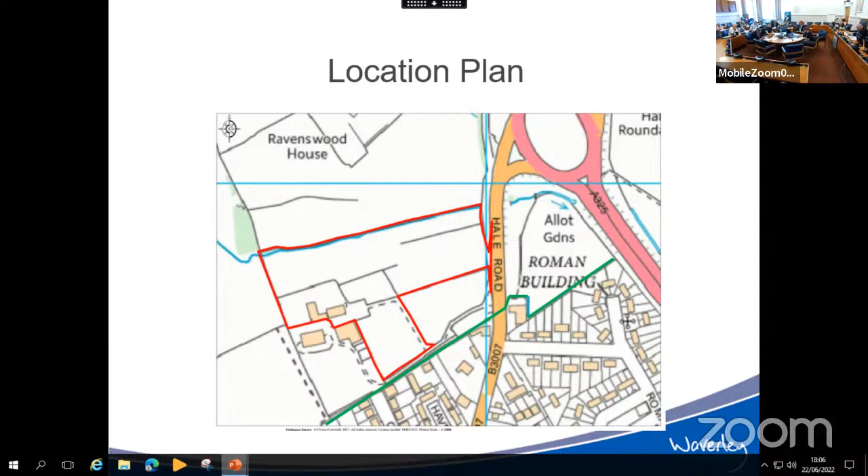So you can see it's a T-shaped site and it's on the edge of Farnham settlement. This green line here denotes the Farnham settlement boundary, so it is located in countryside. You've got the Six Bells roundabout here and the Six Bells public house here. It's an outline planning application with all matters reserved except for access, so the matters that aren't under consideration tonight are appearance, landscaping, layout and scale.

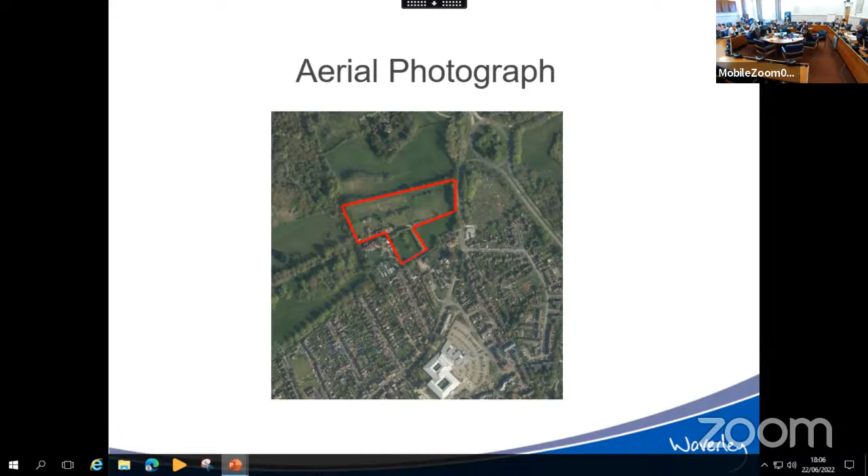This aerial photograph provides you with a bit more context, so you can see very clearly the line of the settlement here. There is also a footpath that runs along here, which is called the Scholars Greenway. You have Farnham Park located to the west of the site, which is an area of historic landscape and a historic park and garden. Should also point out this is the Leonard Cheshire Centre, a residential care home for children with learning disabilities. The site is located in an area of great landscape value and an area of high landscape value and sensitivity, as designated in the Farnham Neighbourhood Plan. So this aerial just helps you get your bearings of the site.

You can see the existing house to be demolished here. At the moment, access to the house is via a shared driveway, which continues up to the Leonard Cheshire Centre but also does a dogleg round to the dwelling.

The site is a combination of house, garden, paddocks and meadowland. You have the Nadder stream running along the northern boundary, and there's also a line of beech trees fronting along Hale Road.

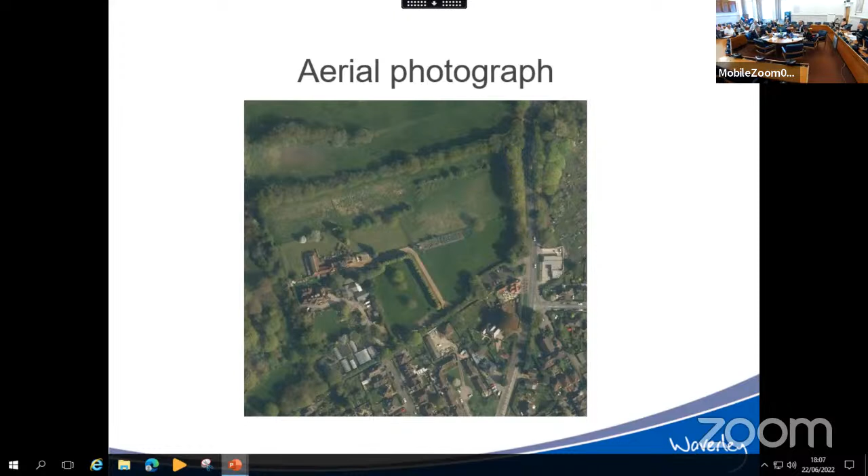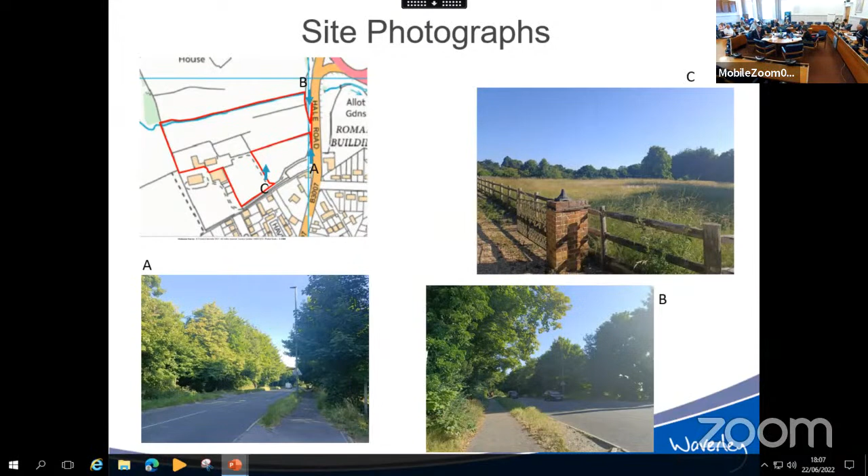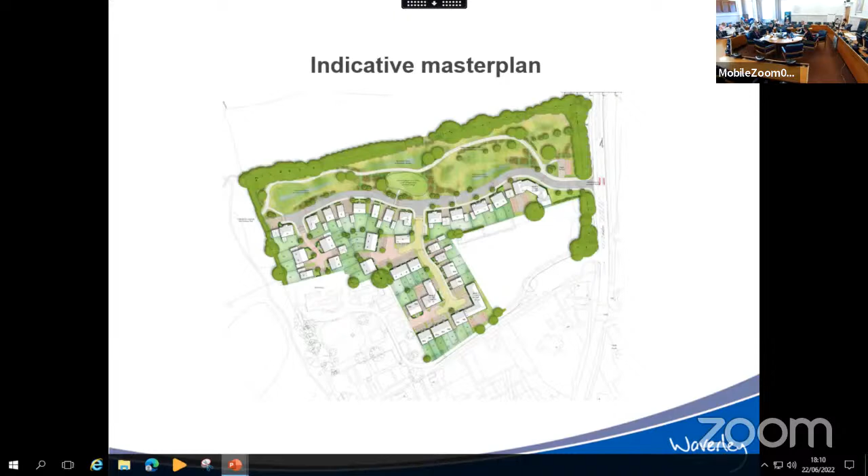So these are some indicative visuals. The first one gives you an idea of how a street scene could look. The second is a visual taken from the western side of the site, looking across the open space, giving an idea of the relationship between the houses and the proposed public open space.

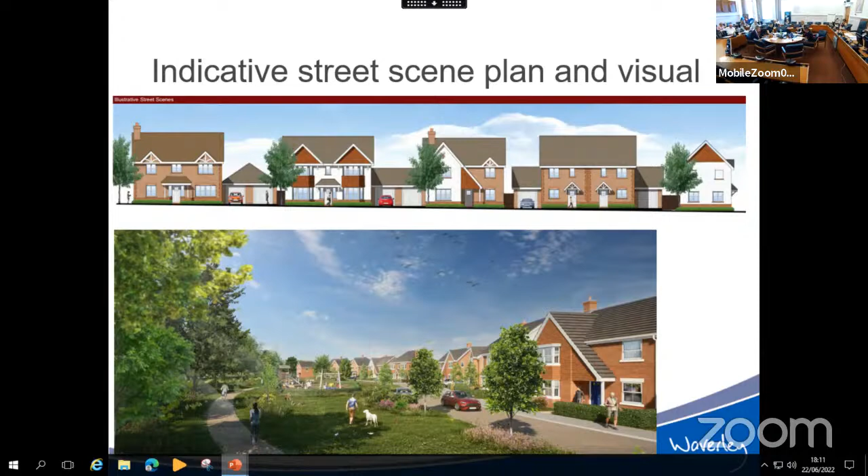We have given consideration of that aspect of the scheme to the trees. You've seen from the photos that there are some substantial trees fronting the site, and we've consulted the tree officer. Through special methods of construction, we feel that a lot of those trees would be retained, but we do acknowledge that some may be lost.

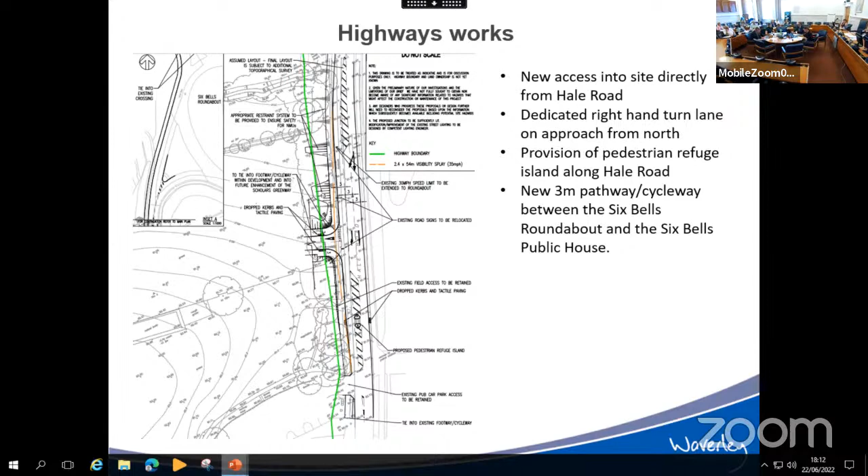So there is quite a lot of relevant planning history, and it is a significant material consideration when assessing this application. In 2017, an outline planning application was submitted for up to 65 dwellings, again with all matters reserved other than access.

This application also proposed open space at the northern end of the site, which was originally proposed as SANG land, but during appeal it was concluded that it could alternatively be public open space, with a contribution towards the SPA to mitigate potential impacts.

The application was refused on 8 grounds, and the decision was appealed. By the time the appeal came around, we were down to 2 reasons for refusal, because all other reasons had been addressed effectively and agreed between the applicant and the council.

The reasons for refusal related to the impact of the development on countryside beyond the green belt and an area of great landscape value, recognising conflict with the development plan, and that insufficient evidence had been provided to demonstrate that the number and density of units proposed was acceptable and wouldn't result in a cramped and crowded development out of character with the area.

The inspector's appeal conclusions are highly material to the consideration of this application. In considering the 2 reasons for refusal, on the second one relating to the quantum of development, the inspector felt the quantum was acceptable and didn't uphold the appeal on this basis.

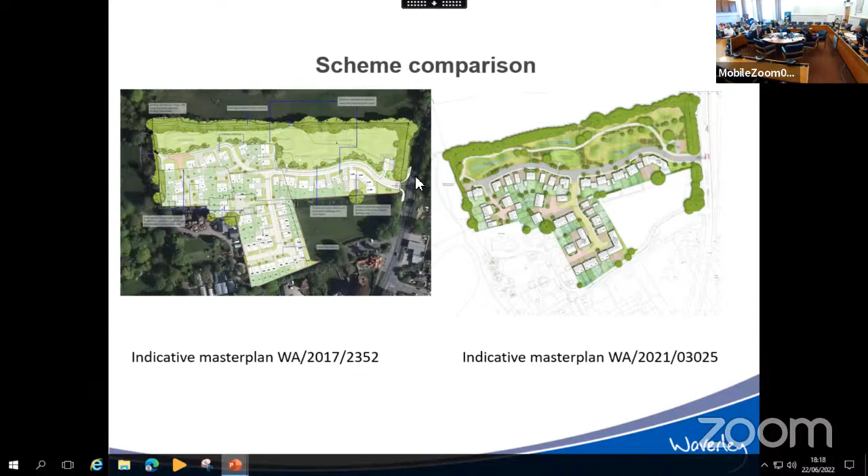Historically, both an appeal inspector and the Secretary of State have considered that the location of development isn't in accordance with the development plan because it is outside the settlement boundary, and this is a negative against the scheme. It has also been established that there are harmful landscape impacts, but both the Secretary of State and the appeal inspector considered these to be limited.

With regards to highways, we have the County Highway Authority here to answer any questions. They've reviewed this proposal and consider it acceptable with regard to traffic generation and highway safety. There were no highways issues raised by either the appeal inspector or the Secretary of State under the previous application.

In terms of market housing provision, there's a good range of market housing, which is a substantial benefit. In terms of affordable housing provision, there's a 40% provision as opposed to policy requirements of 30%, and again the provision of affordable housing is a substantial benefit.

Through contributions, the proposal wouldn't have a harmful impact on the SPA because contributions would be made towards SANG. In relation to biodiversity, the applicants have set out how they can improve the biodiversity of the site because at the moment there is species-poor grassland there, and through improving the variety of grasslands and planting more trees within the open space at the northern end of the site, they feel they can improve the ecological value of it.

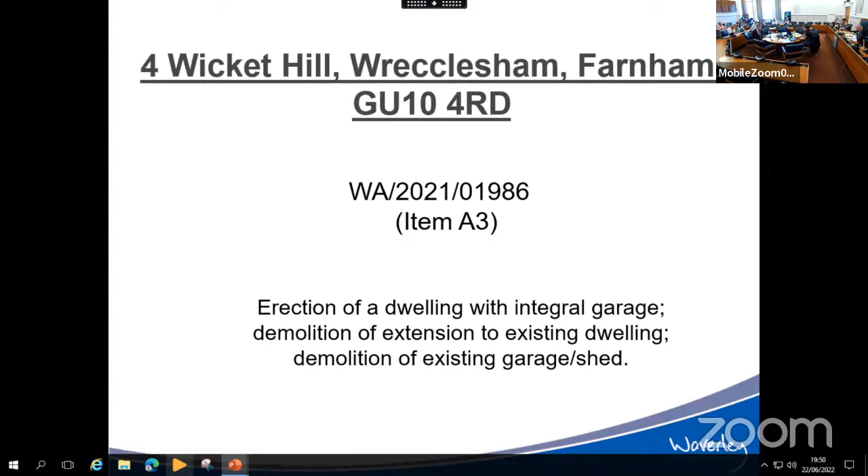The application site is outlined in red on the above location plan, with the existing plot sizes shown, access from Wicket Hill. The application site is located in the developed area of Farnham.

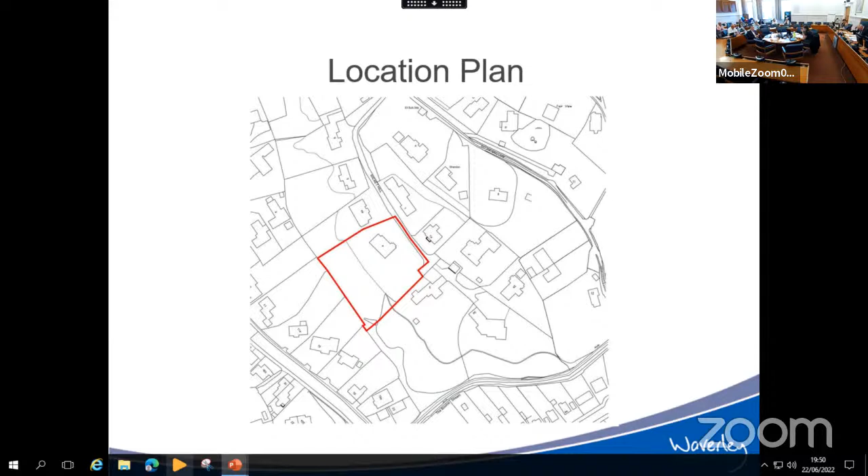This slide provides the proposed block plan of the new dwelling, which follows the existing building line of the dwellings located along this side of Wicket Hill.

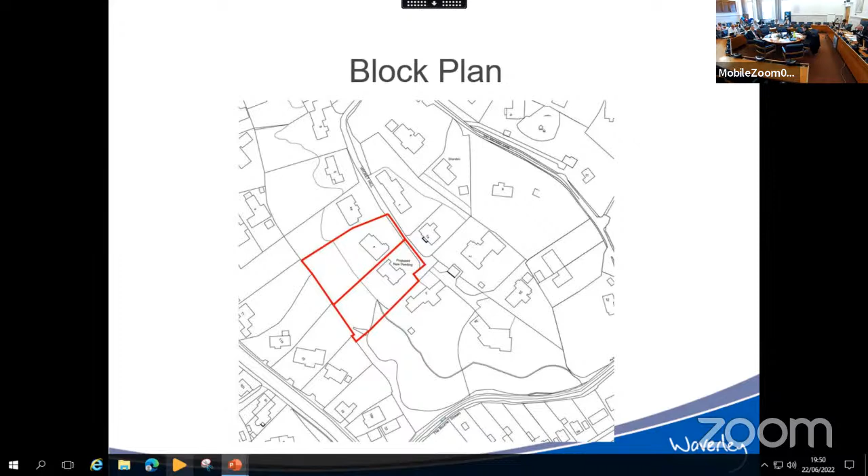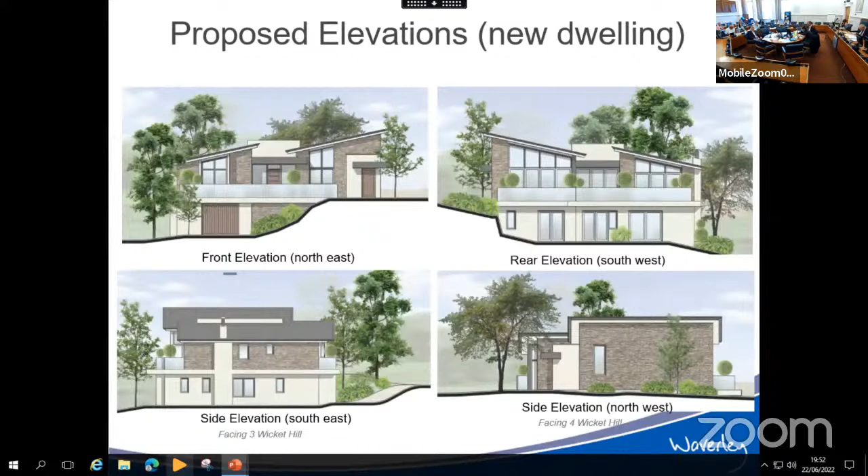This slide shows the existing elevations of 4 Wicket Hill, which is to be retained. The small office here and the garage and store to be removed, which will be demonstrated on the next slide.

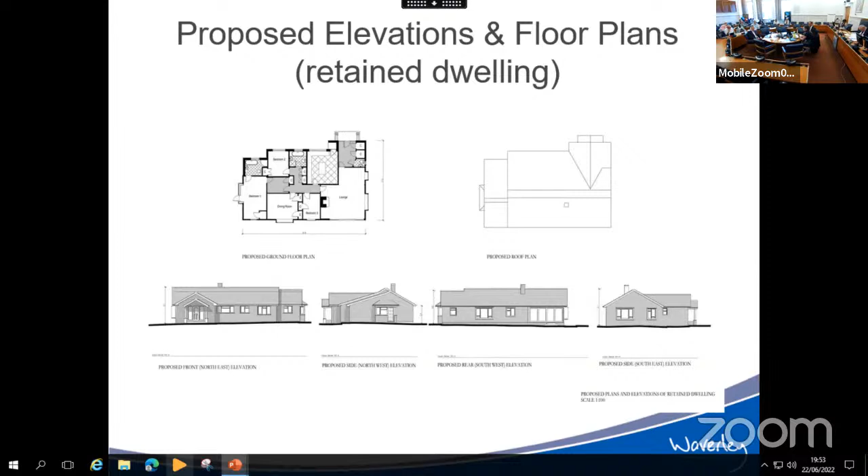As you can see, a small area of the extension has been removed, and I've provided a comparison of these two here. So as you can see, the dwelling remains mostly the same apart from the removal of those extensions.

This is demonstrated by the ridge height on this elevation facing 4 Wicket Hill being the same as the proposed dwelling and 4 Wicket Hill would have the same ridge height.

It is acknowledged that the proposed dwelling would sit at higher land levels than 3 Wicket Hill. However, there is a 9-metre separation distance proposed between the flank elevation of the proposed dwelling and the shared boundary with 3 Wicket Hill.

The key matters for consideration are the impact on design and visual amenity and the impact on residential amenity. Officers consider that the provision of a dwelling in this location is in accordance with the development plan and are recommending approval of the application.

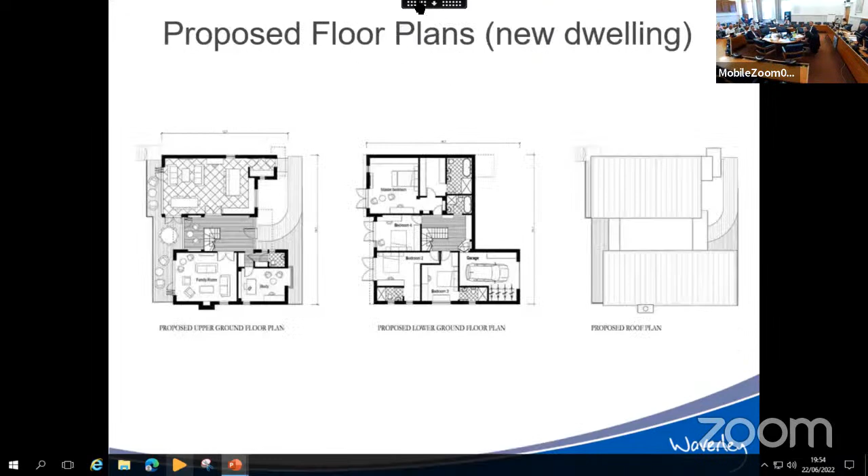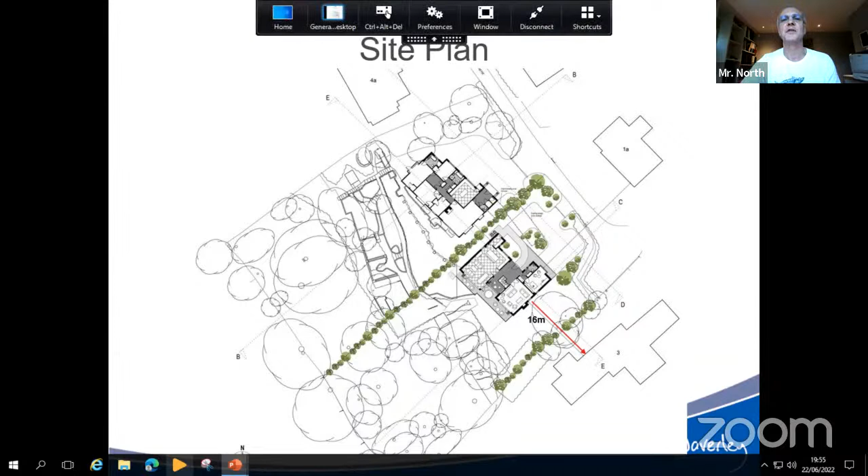Okay, fine. Basically, I am one of a number of objectors representing others including Farnham Town Council, councillors, the Bourne Conservation Group, Badger Protection Group, as well as numerous residents. Both the Bourne Conservation Group and Badger Protection Group have actually seen the site, whereas the Surrey Wildlife Trust hadn't. The 4 items I'd like to discuss are housing density, the impact of overdevelopment, the threats to nature conservation, and in that context, the unreliable nature of the ecology report, and essentially non-compliance with the Farnham Design Statement and Neighbourhood Plan Policy.

With regard to the housing density, the applicant asserts in the Design and Access Statement that the proposal fits in with the pattern of surrounding development and continues the rhythm of development along Wicket Hill. We believe this to be an inaccurate and misleading statement. If you look at the map on the right, you can clearly see that all the dwellings currently in place have at least 12 to 20 metres between them, whereas the 4th dwelling and the proposed dwelling will only have about 4.5 metres between them. So I think it's a little disingenuous to make that statement.

Another statement they make regards the environmental implications of the development, and that requires the council to have regard to those implications. Again, we believe this is a misleading statement. Included within the proposed dwelling area is the underground nature reserve. This reserve is to the southeast of the proposed dwelling, but it extends via a wooded area all the way up Wicket Hill in the back gardens of 4, 4A, 5 and 6. This is a really important nature reserve, which I'll talk about in a minute.

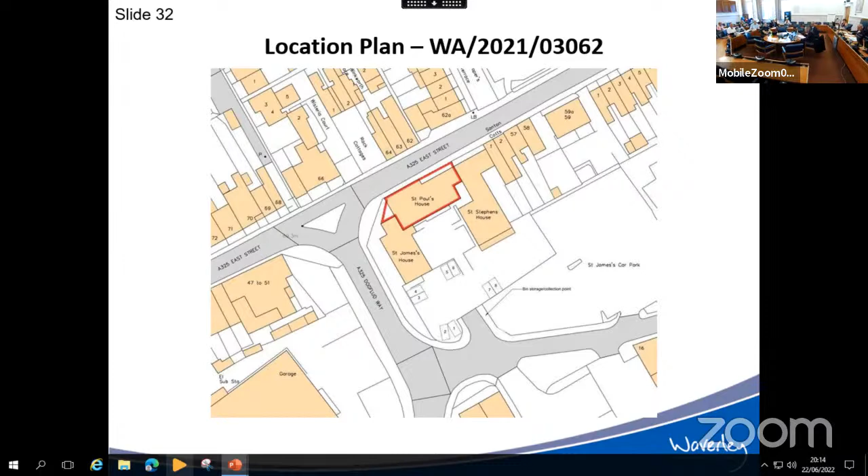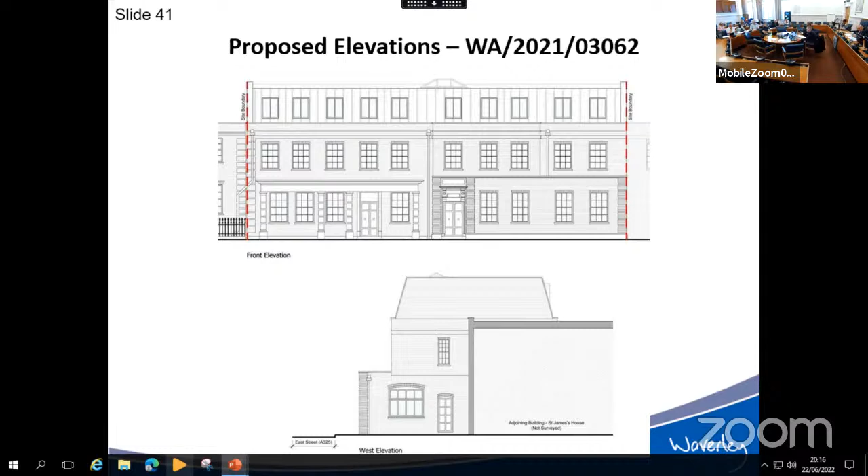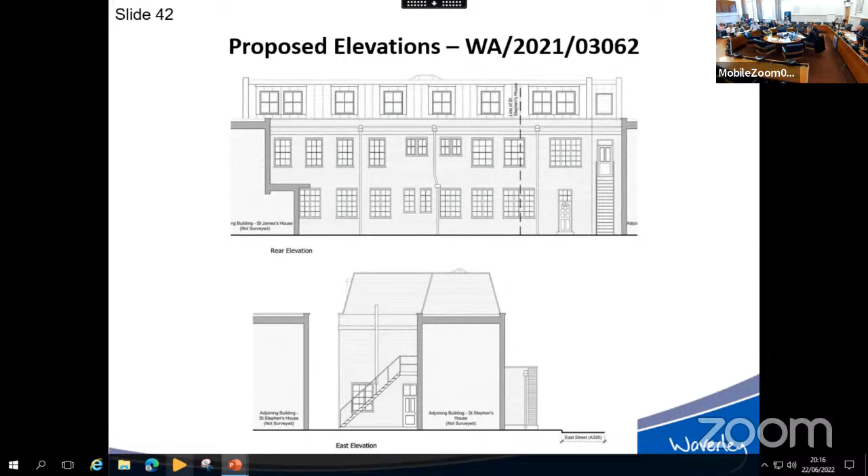So the key issues here: the design of the mansard roof and the consequent impact on the character of the area; the fact that the application does not provide dedicated parking, and whether the sustainability of the location outweighs that; and of course, again, the lack of 5-year housing land supply with the current engagement of the tilted balance.

Right. Well, actually, the ward councillor for the ward, Councillor MacLeod, has asked to speak on this item. So Councillor MacLeod, are you still with us? Yes, I'm here, Chair, thank you. I'd just like to make a few remarks, if I may, Chair. First of all, to point out the objection from the Town Council.

The Town Council regards this development as overdevelopment of the site, and the bulk and the mass as being obtrusive and having a negative impact on the street scene. The Town Council is also concerned about the lack of parking. Obviously, the change of use application already in place doesn't have any parking, so there's probably no way in which parking could be provided for the additional 4 flats.

But one of the things the Town Council points out is that there's a similar situation in the Woolmead application, where a reduced amount of parking was provided, and what happened there was a condition was applied that the flats without parking couldn't apply for parking permits within the Farnham Town Centre controlled parking zone. The Town Council requests that the committee consider imposing such a condition.

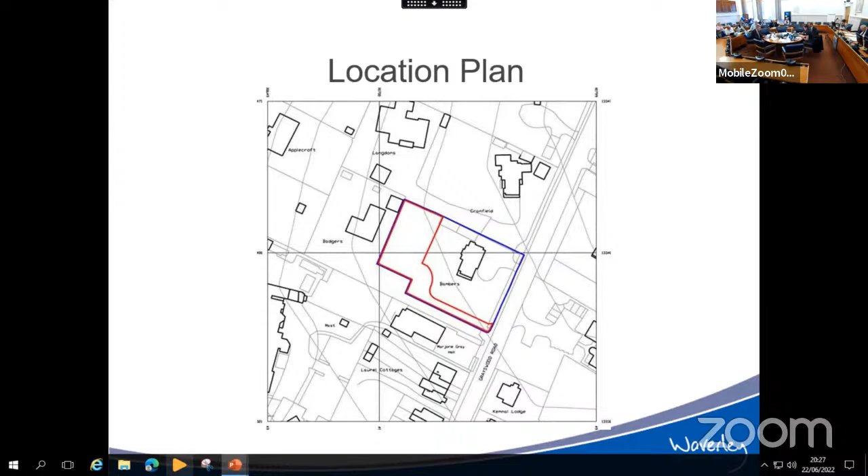For reference, this is the block plan of the 2021 scheme which was refused by members. The differences between the current proposal and the one before you today: there is a revised roof design, which includes the removal of the pitched roof, reducing the bulk, mass and ridge height of the scheme. There's a revised positioning within the plot, which moves the dwelling away from the boundary with Badgers, and a reduction in the floor area of the proposed dwelling.

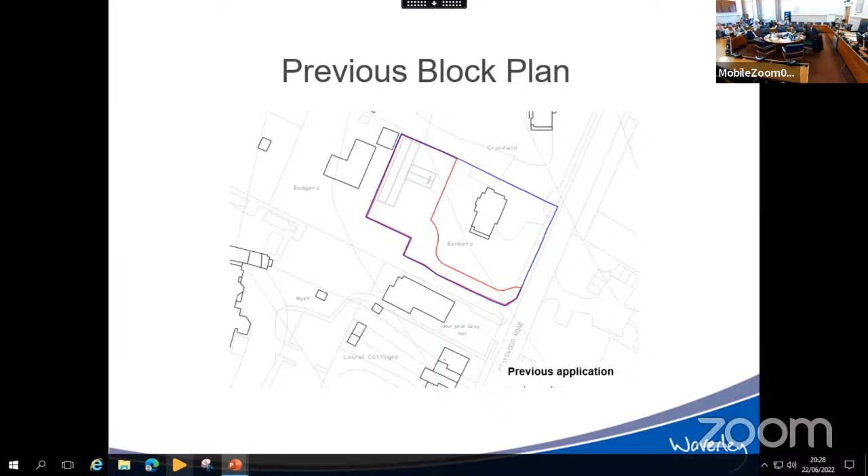Here are some comparisons of the previously refused and the current application. I've done this across the elevation so you can see what was previously put forward and what you'll be assessing today. The test for members is to see whether this application has overcome the previous two reasons for refusal.

At the top of this slide is the previous application, and at the bottom is the current application. I would point out that the current scheme shows the background of Badgers, so as you can see, the ridge height would fall in line with the bottom of the windows in the roof, as you saw in the previous photographs.

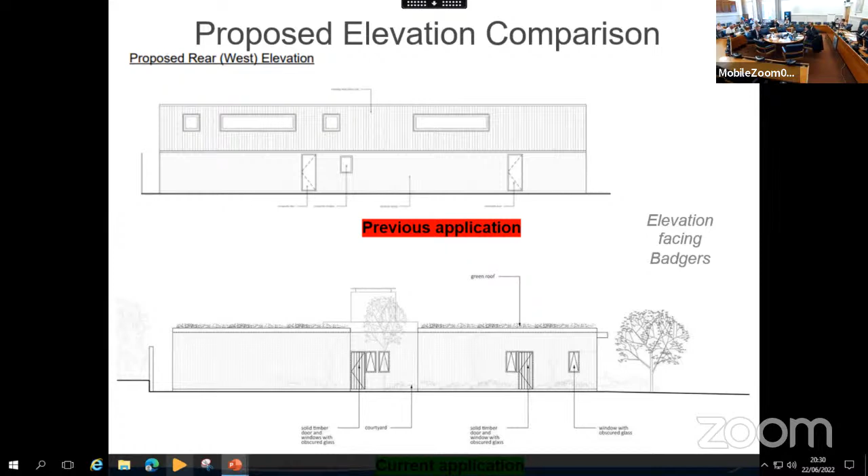This slide demonstrates the elevation which would face Badgers. As you can see, it's single story and has a lower ridge height. If you go to condition 3, you can see that all these windows have been conditioned to be obscurely glazed. They are also at single story level. The reduction in ridge height from the previous scheme is from 5.3 metres to

3.6. This slide provides a comparison of the other side elevation, which would face Cranfield on the block plan. Sorry, Badger's driveway, and this would be the other side elevation, which faces Cranfield.

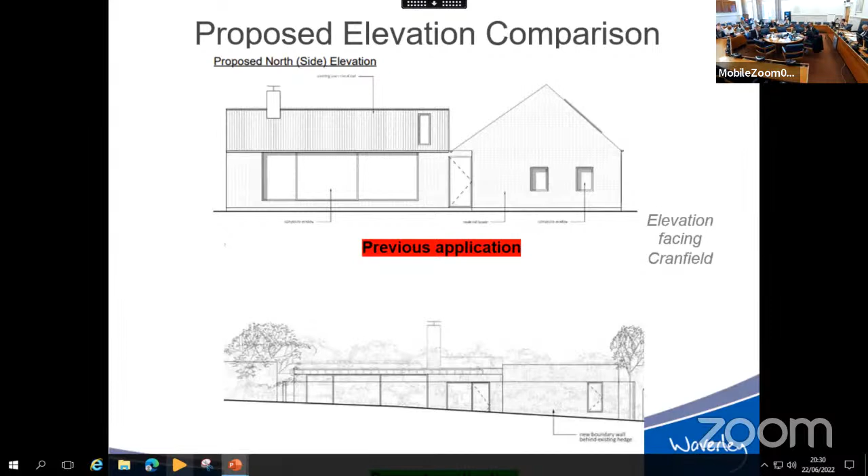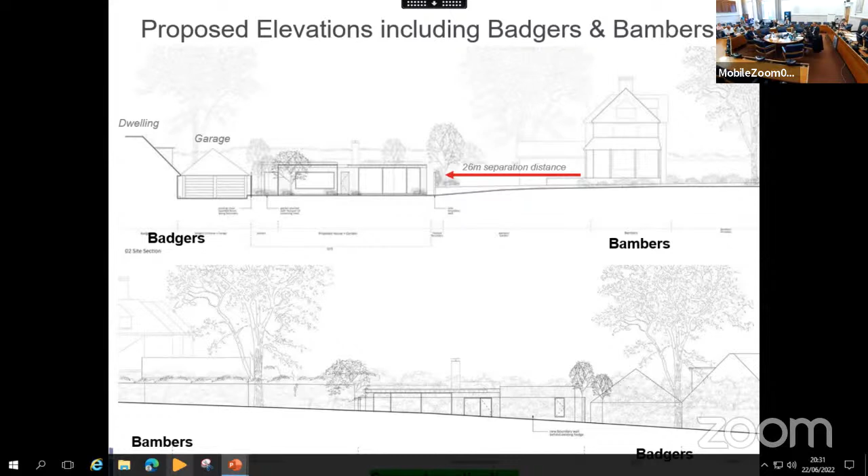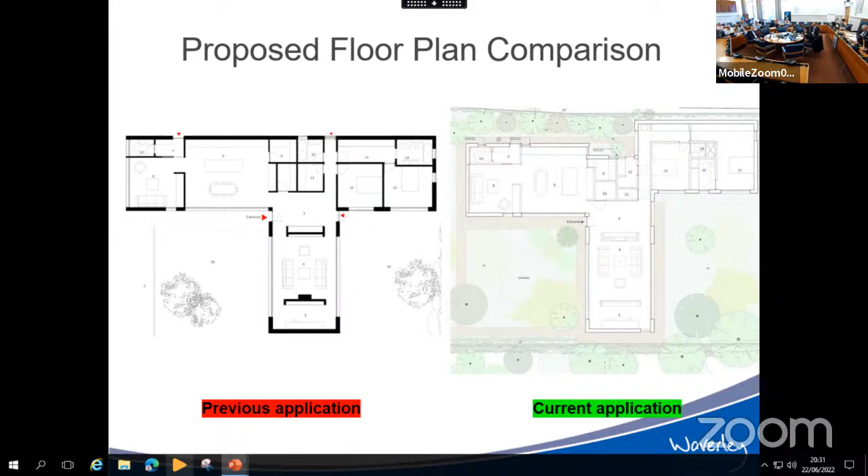These are a proposed floor plan comparison. On the left-hand side, you have the previous scheme, and on the right-hand side, you have the current application. As just pointed out, it has been pulled further away from the boundary, and these distances are set out within the relevant section of the officer report.

So the key matters for consideration tonight, these are the two previous reasons for refusal, is whether you consider that the new application has overcome these reasons for refusal, and as set out in the officer report, officers are minded to approve the application subject to the relevant conditions.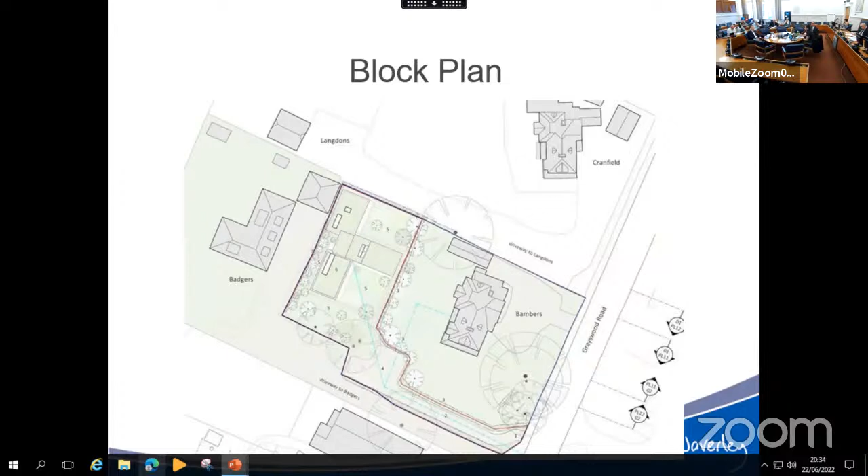And can I just come back to, at the moment, on the previous photograph, it shows a wooden fence between the new Badgers. So it's already, it hasn't got a hedge and the stuff there at the moment. It's got a wooden fence there, a wooden fence and no greenery at all.

It all looks quite low. So can you confirm there are no overlooking issues with this? I can confirm the whole dwelling is single story.

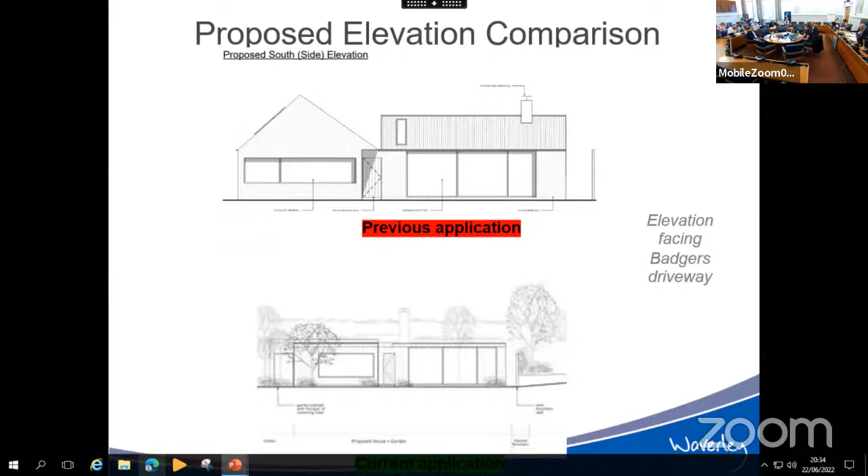So as you can see from the elevation comparison here, I think is quite helpful. You can see Badgers behind, so the single story dwelling would fall below that. So it would be in line really. It would be slightly above the fence. But I think given that you can obviously see the garage positioned adjacent to the boundary, it would be difficult to object to a single story structure that is obviously adjacent to the shared boundary, but between that there is a garage and the parking area of that dwelling.